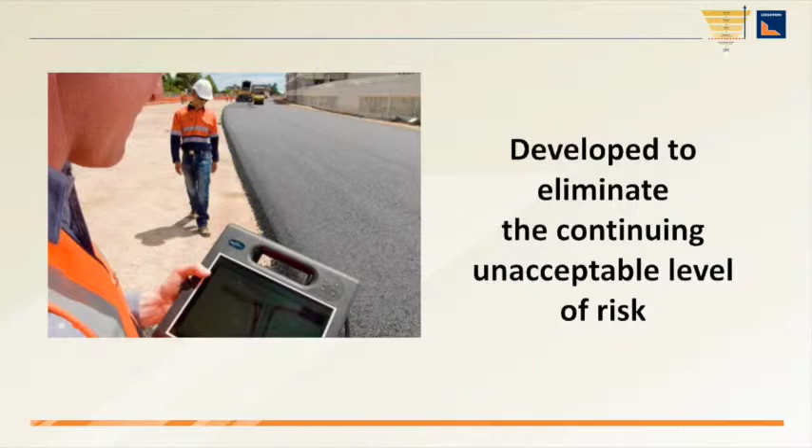The Construction Safety Essentials have been developed to eliminate the continuing unacceptable level of risk by reinforcing the Leighton Contractors' practices necessary to address specific critical risks. The Construction Safety Essentials reinforce our business standards and management system processes. They do not replace them.

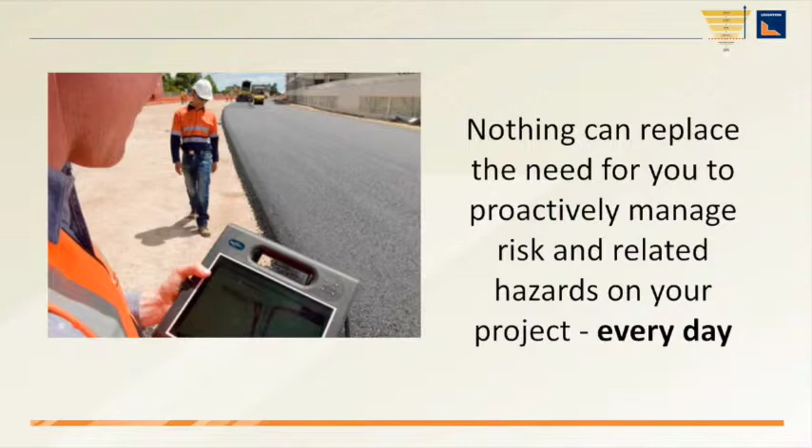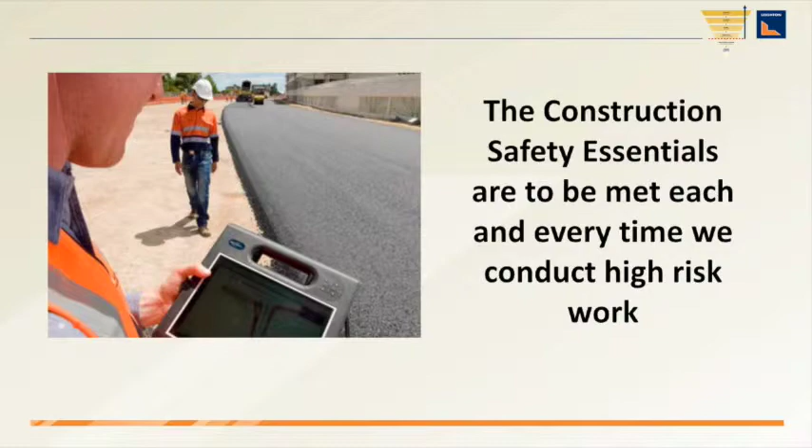The Construction Safety Essentials do not address every possible risk that potentially exists on your project. Nothing can replace the need for you to proactively manage risk and related hazards on your project every day. As a leader, you're expected to remain vigilant in your area of responsibility and to ensure that the requirements prescribed in the Construction Safety Essentials are met each and every time we conduct high-risk work.

Each one of us as leaders needs to accept personal accountability to communicate the requirements of the Construction Safety Essentials and ensure we manage these identified high-risk activities effectively.

The Construction Safety Essentials are designed to provide clear direction for the management of critical risks that our people and those with whom we work are exposed to on a daily basis.

These essentials do not address all critical risks. They are the minimum requirements. The Construction Safety Essentials are designed to reinforce Leighton Contractors' construction safety management system procedures, not replace them.

You should at all times continue to be alert to other possible risks or hazards in your particular area. These requirements have been developed from lessons learned based on our incident history. We will continue to learn from our experience and may in future develop additional essentials for other critical risks where necessary.

Your accountability: the Construction Safety Essentials apply to all projects where Leighton Contractors is involved.

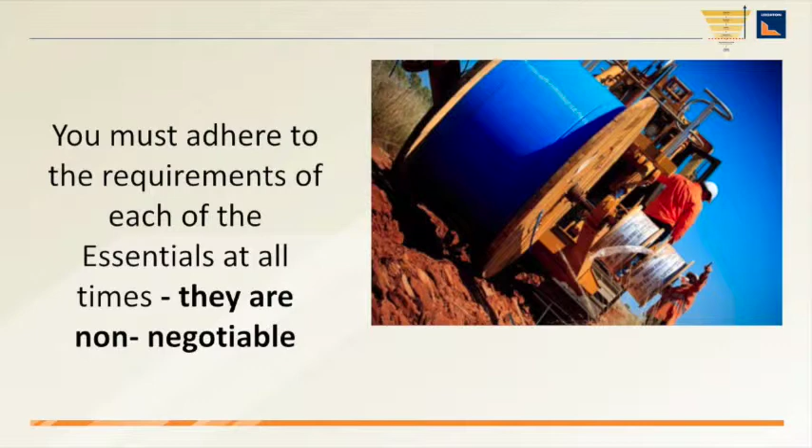As a Leighton Contractor employee, you must adhere to the requirements of each of the essentials at all times. They are non-negotiable. All breaches of an essential will be investigated, and where an employee has been trained, deemed competent, and has violated an essential, disciplinary action may be taken which could ultimately result in termination of employment.

You have an obligation and responsibility to report any breaches that you see that are out of your control to your supervisor or leader once removed.

Before commencing work, make sure each work activity containing a critical risk as deemed by the Construction Safety Essential must be assessed, managed and recorded in Active Risk Manager prior to commencement.

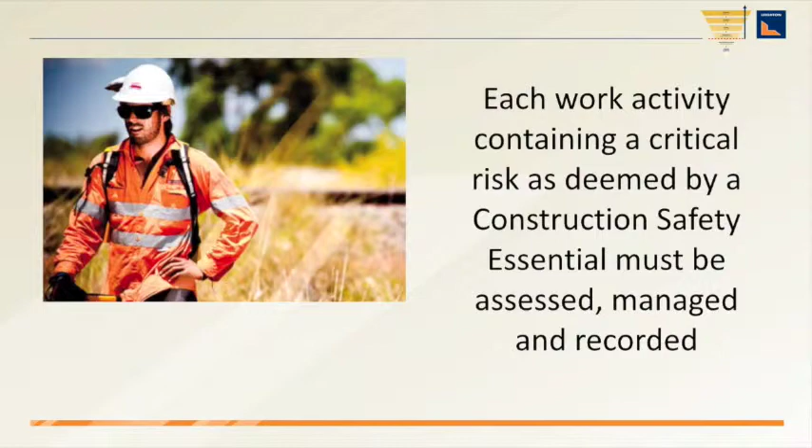When considering risk treatment options, the first consideration must be to eliminate the risk. Where the risk cannot be eliminated, the hierarchy of controls must be applied where the highest possible level of control is selected. Critical risk covered by the Construction Safety Essentials cannot have administrative or personal protective equipment selected as the principal control except under exceptional circumstances.

Exceptional circumstances must be approved in writing by the project manager or direct manager of the project.

No person can be appointed to the Construction Safety Essential activity unless they have satisfactorily completed a training course in the specific essential. When developing safety, health, and environment work method statements,

hazards identified and controls determined in the risk review process and those identified by work teams will be incorporated into the Safety, Health and Environment Work Method Statement.

Critical risk activities require a higher level of supervision.

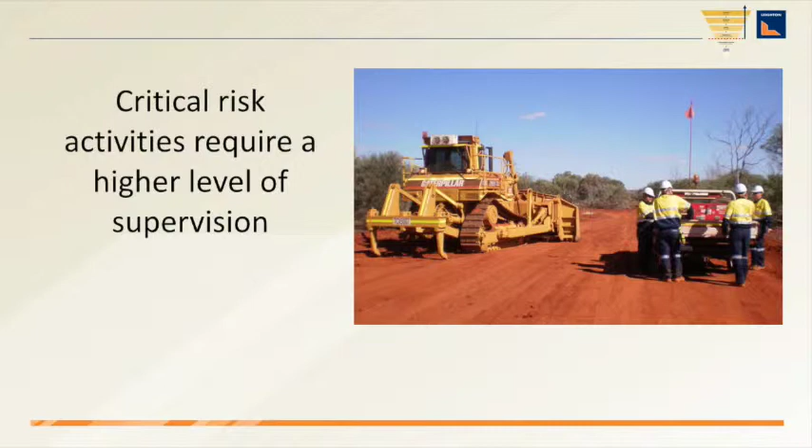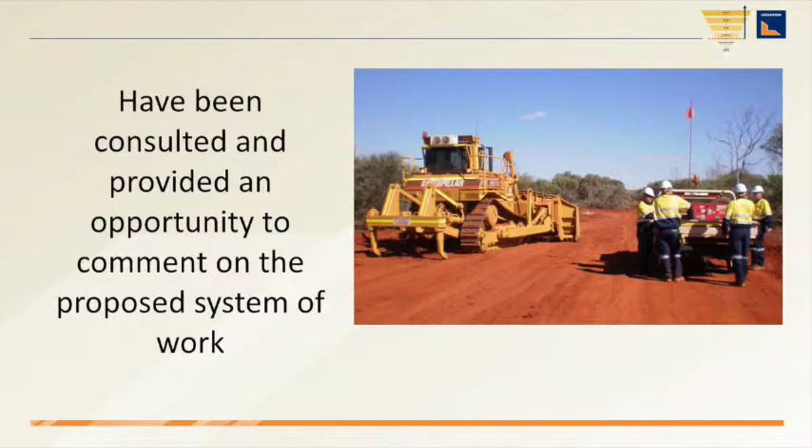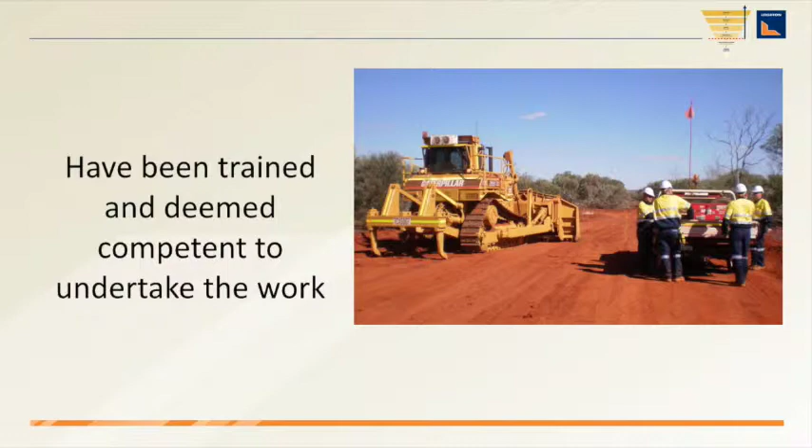Supervisory arrangements appropriate to the level of risk shall be determined so the work team knows who their supervisors are. The responsible supervisor will ensure that all people involved in the critical risk activity have been consulted and provided an opportunity to comment on the proposed system of work, have received instruction in the Safety, Health and Environment Work Method Statement, have been trained and deemed competent to undertake the work, and understand the risks and controls.

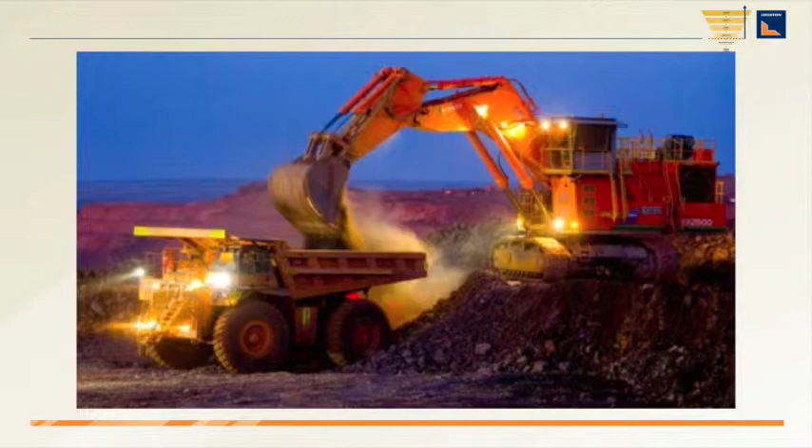The supervisor must be able to demonstrate at any stage of the activity that the nominated controls are in place and are being implemented. All relevant licenses and permits to work must be obtained prior to commencement of the work. The appropriate emergency response to critical risk activity must be planned, known by all involved in the activity, and be ready to be implemented.

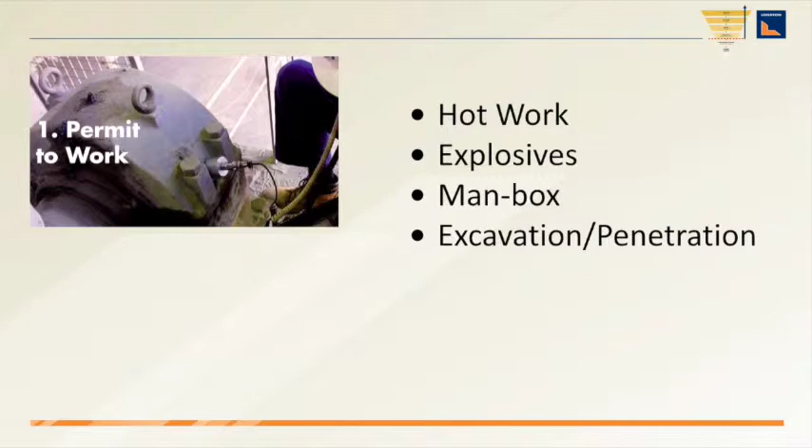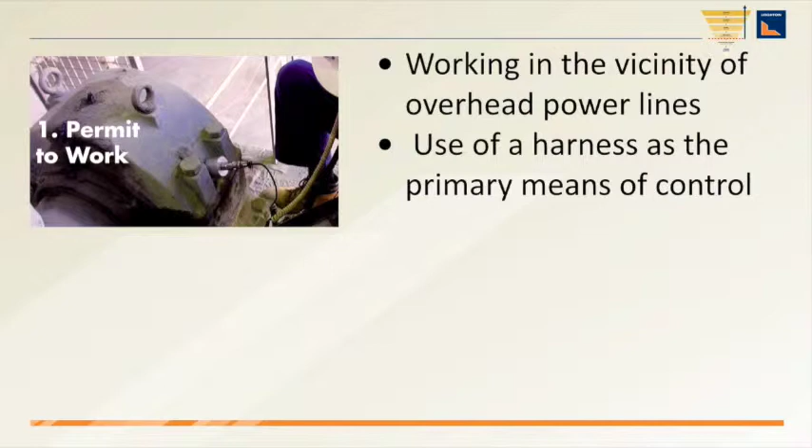A permit to work must be obtained and authorised by the project director or manager before commencing any work involving hot work, explosives, man-box, excavation or penetration, confined spaces, work at heights, work in the vicinity of overhead power lines, use of a harness as the primary means of control, isolation and de-energization of hazardous energy, or any other activity identified through the risk assessment requiring a permit.

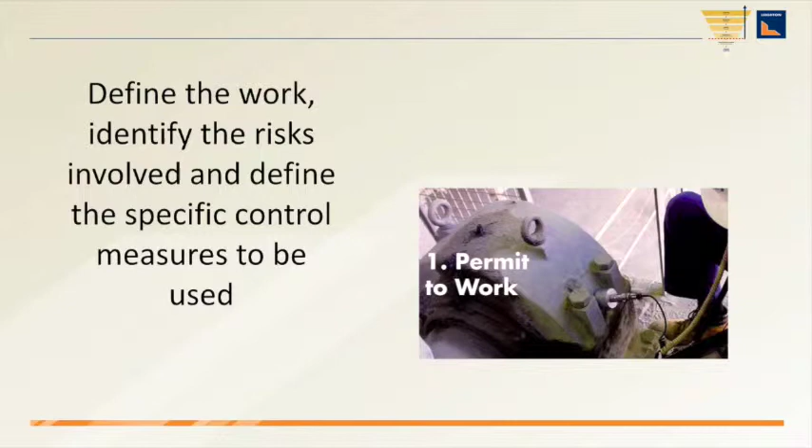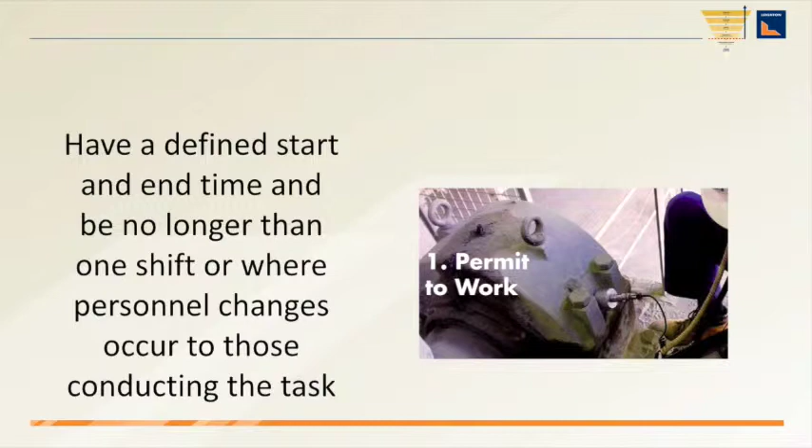All authorised permits must be readily available in the vicinity of the task location. The permits must define the work, identify the risks involved, and define the specific control measures to be used, reference the applicable Safety, Health and Environment Work Method Statement, and have a defined start and end time, being no longer than one shift, or where personnel changes occur to those conducting the task.

Identify any other activities impacted by the work. Specify the personnel authorised to do the work and identify the responsible, competent person. Require all personnel involved in the activity to sign off on the permit.

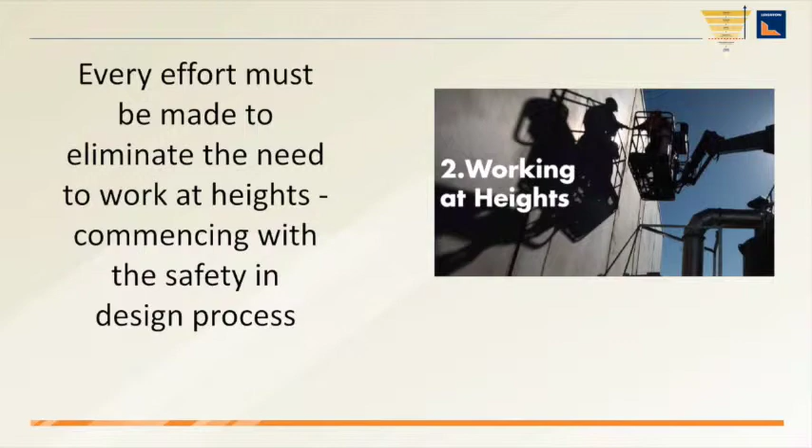Every effort must be made to eliminate the need to work at heights, commencing with the safety in design process. Where elimination is not practicable, workers at heights shall be protected by carrying out work on a level surface with secure, compliant, fixed edge protection.

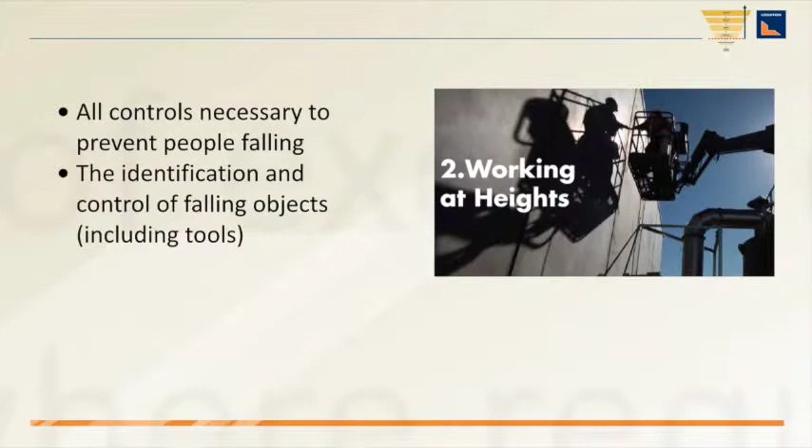Harnesses are not to be used as a primary means of control without approval in writing by the project manager or director, or the project manager's or director's direct manager of the project.

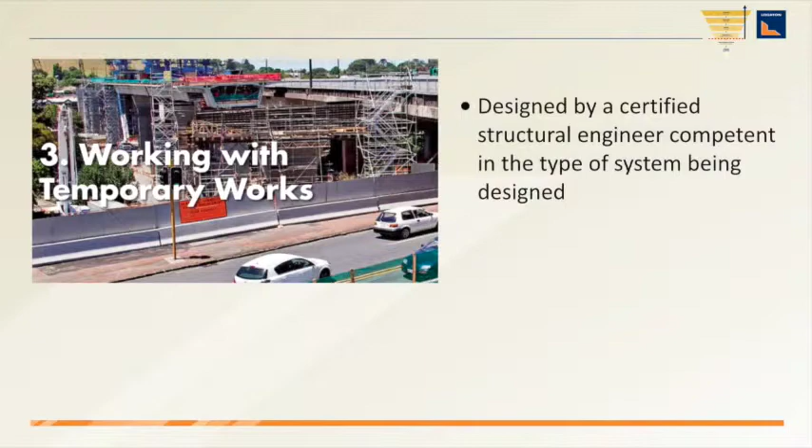A work at heights permit is required where there is a potential to fall 2 meters or more and there is no compliant fixed edge protection.

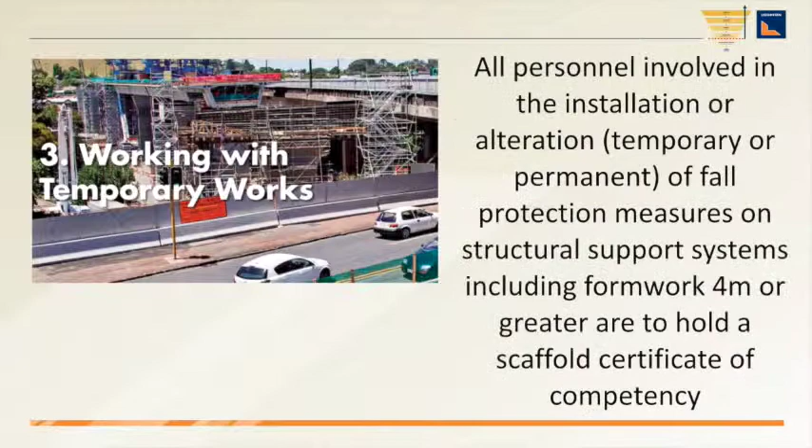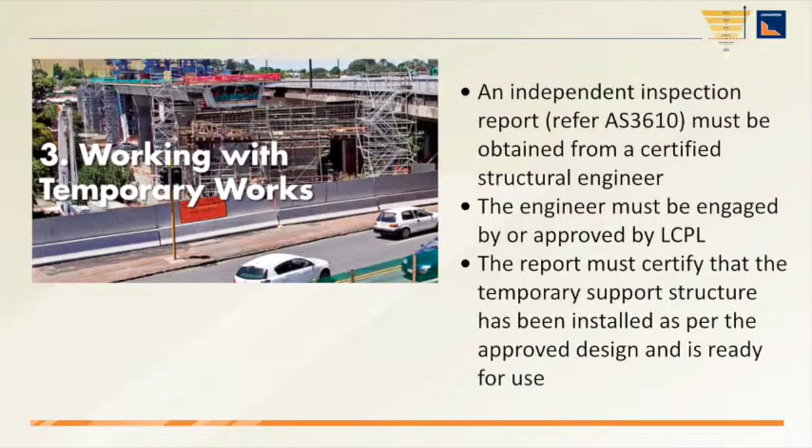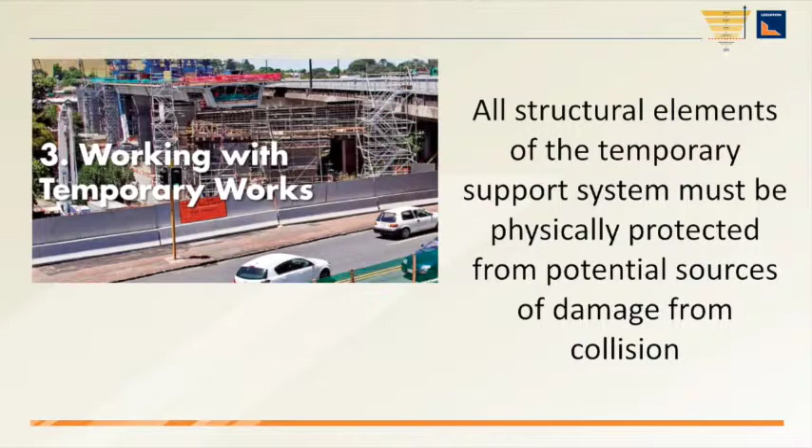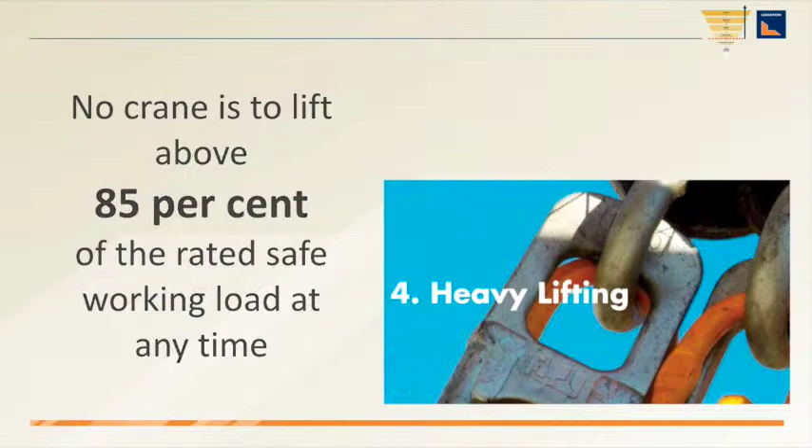The applicable Safety, Health and Environment Work Method Statement must be compliant with the approved Construction Division Work at Heights procedure and include the following: any controls necessary to prevent people falling, the identification and control of falling objects, the use of exclusion zones, rescue arrangements for all people working at heights, and relevant training and competency requirements to competently complete the work.